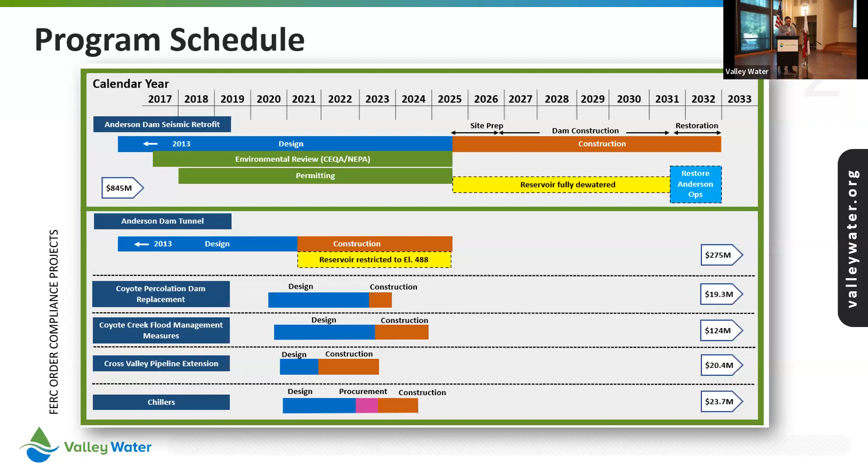Okay, so the Anderson Dam Tunnel Project. So we like to call this stage 1 of the Anderson Dam Seismic Retrofit project for 2 reasons. First, it's the first part really relating to the dam and the retrofit project itself, but also it's stage 1 of our diversion system that we need to pass flows from the reservoir out into Coyote Creek during construction. So a really important component of the overall project.

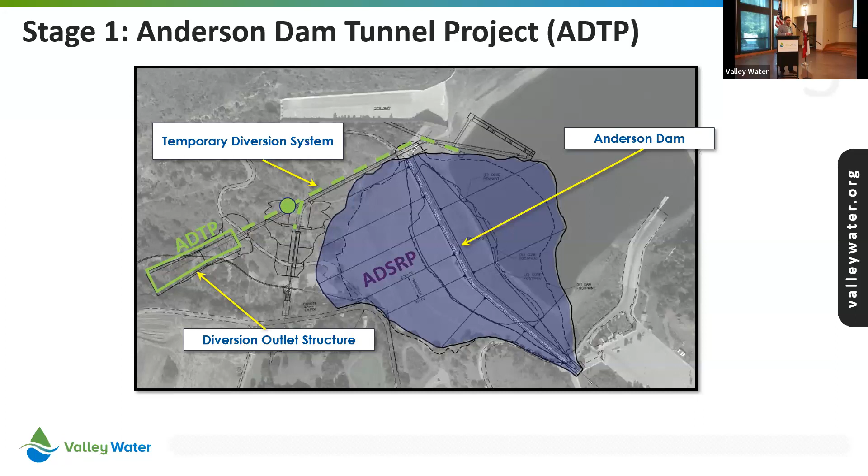So this is kind of an interesting component. This last stretch of the tunnel gets completed with a micro tunnel boring machine, an 8-foot diameter machine that will basically plunge right into the water with about 30 feet or so of head above it. So that's a pretty critical component here. So we're going to be coming in lower than the current level that we can currently achieve. So pretty fancy technology there to do that.

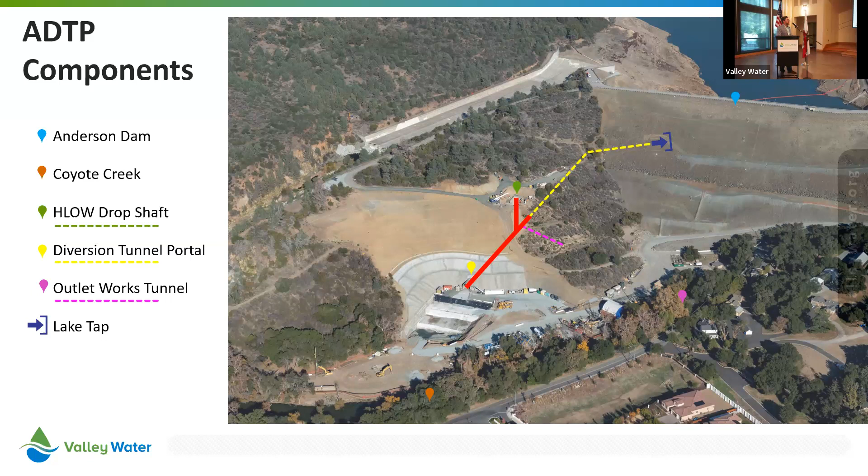So I'm going to click the button here and you're going to see the progress that we made on the tunneling. The shaft you can see is completed and the tunneling is past the shaft. We've completed about 440 feet of the tunnel so far. It's about a 1,700 foot long tunnel. So we made some good progress. We started on November 9th last year, and we're moving through it. It's not easy tunneling. It's a pretty big tunnel. It's 24-foot diameter where we are now, and the ground conditions are a bit challenging, but we're making it through.

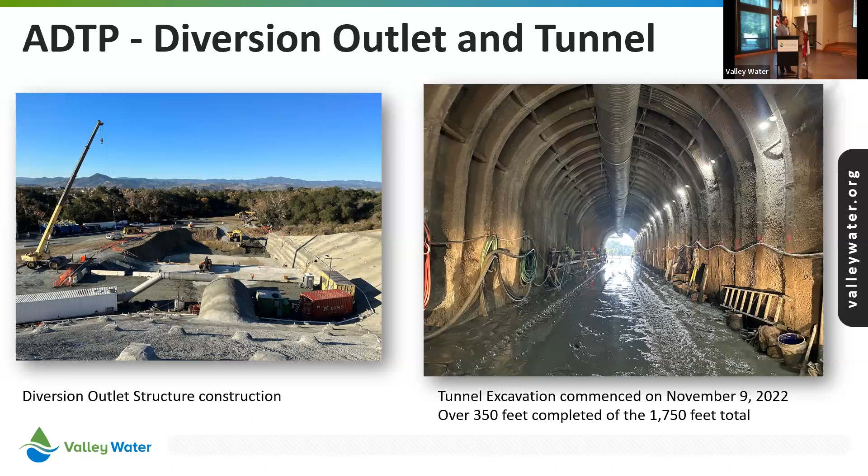But what we had to do is excavate down about 15 to 20 feet to remove all the soil and some of the old fill that was kind of adjacent to Coyote Creek prior to the dam being built. So we had to make sure we had a nice stable foundation for that. So pretty large excavation there. That's all been completed. And actually, I think there's a poster back there that shows a really updated photo of what the diversion outlet structure looks like with some of the formwork for the foundation. So be sure to check that out.

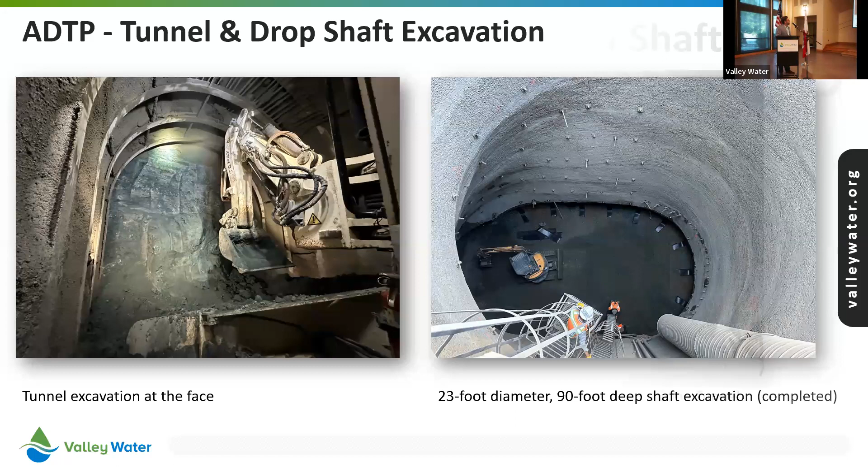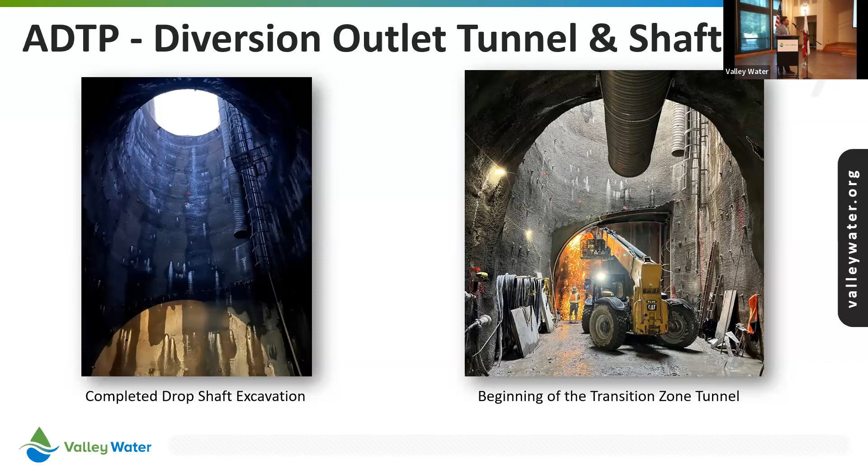And we are still looking at completing a slope stabilization project here on the Boat Marina landslide that consists of quite a bit of grading as well as soil nails being installed to support that slope. Working with our contractor to get a price. There's been some design updates and really upgrading what that looks like. So we're working on that. On the Hoot Owl Way landslide, kind of a similar situation as we looked at the monitoring and added quite a bit of design features and quite a bit more construction. It started to look like it was going to be pretty hard to actually stabilize this landslide for perpetuity, as well as it became really, really expensive.

So we looked into these property owners that own homes around here. There's I think 7 different property owners of 9 parcels total, and we started talking to them if they would be interested in selling. And actually, we've completed 6 of the acquisitions of these properties voluntarily, which has been great. And we're working on the 7th one as well. So no eminent domain needed there yet, so that's great.

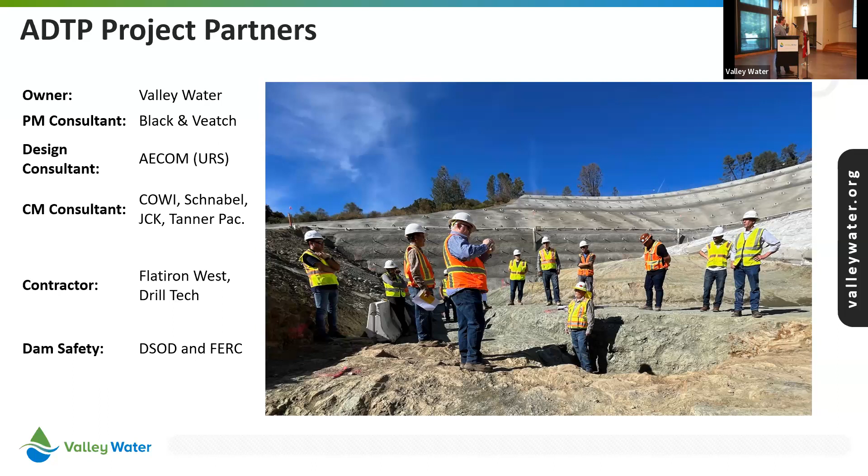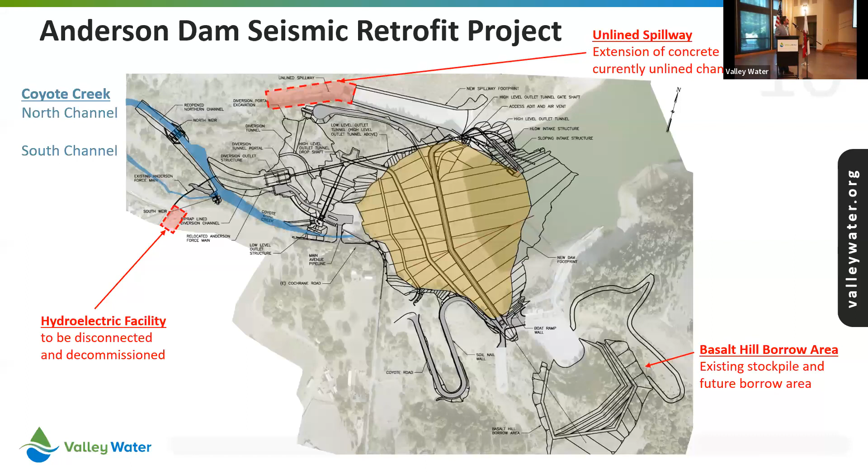Okay, so what I really wanted to tell you all about is the construction sequence of the dam embankment, because this is really a critical component of this project. It is why it's going to take so long, because people ask that question a lot, why this project will take so long. They built the original dam in 1 year, why can't we build it in 1 year? Well, things have changed. There's a lot more safety concerns. There's a lot more homes downstream that weren't there before, and a lot of other factors to make sure we build this thing right the second time.

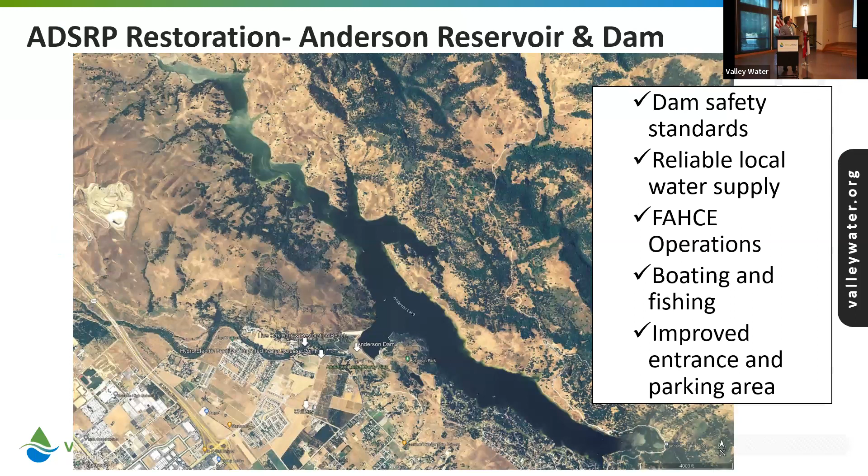And then the second question is, is the weather a risk for this project anyway? It seems like you're not doing construction during certain winter periods. Is the weather in any way something that could cause this thing to extend beyond 2032 if we had really unfortunate weather?

Yes, weather is definitely a big concern. It'll be difficult if we get early storms in the winter, like October and November rains, because we're still going to be working on these interim dams and maintenance starting in the summer and trying to get this work done. And that will be impacted. That's why we don't plan to do any work over the winter season, because basically we get to this point and we winterize the site.

We seal everything up. We create a spillway that will convey water if the water is to reach over the top of this interim dam, and a lot of other features to keep the site protected during the winter. But if there are early storms or even late storms in the late spring, that could affect our production.

And Ryan, so this was a pretty record winter, and it was completely at dead pool, and it got to 52%. So if we had a winter like we just had, and it was dry to start with, it would be at 50% capacity. So that's just a frame of reference, right? Yeah, I think it actually reached 56%, I think was the peak. Yeah.

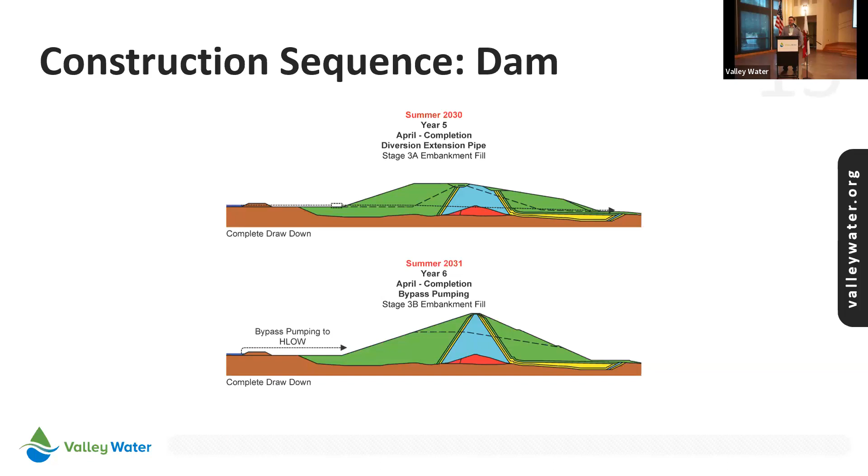Next question. Will the melting of the record level snowpack in the mountains pose a flood risk to this specific project? No. There's no connection. What are the implications to the surrounding land around the lake, specifically the homes, when water levels rise and lower with storms such as what we had this year? Yeah, I did have a slide. I talked a little bit about the rim stability and the movements that have been tracked over the years around the reservoir. Sure.

There we go. So I did talk about the Hoot Owl Way and the boat marina landslide areas, two of the areas that have been known for quite a while to be moving. Now I can't remember exactly what the question was. Is there something else that I needed to share?

Right. So these ground movements are activated by water and drying. When the water infiltrates into the ground and then dries out, there's movements associated as the slopes slowly move downhill. That's how they work. We've been monitoring these since we did the drawdown starting back in 2020, and then looking at how they were affected in 2021, as well as during this current year. There hasn't been anything too drastic.

We think a lot of the movement that we've seen was really just associated with the rainfall, the superficial movements and erosion from the rain coming through, and not so much the reservoir level. But it's something we're actively monitoring. There's a couple other locations, one near the dam, that we're also watching pretty closely. And we're seeing, as expected, what we would think would happen during these filling

and draining events. What materials will be used for the dam's new core? The core will be predominantly a clay material, so that it's not as permeable as a rock material, so the water can't flow from the reservoir through the dam. The reservoir area will be used as borrow material for the clay core, as well as the existing clay core. A lot of that material will be reused.

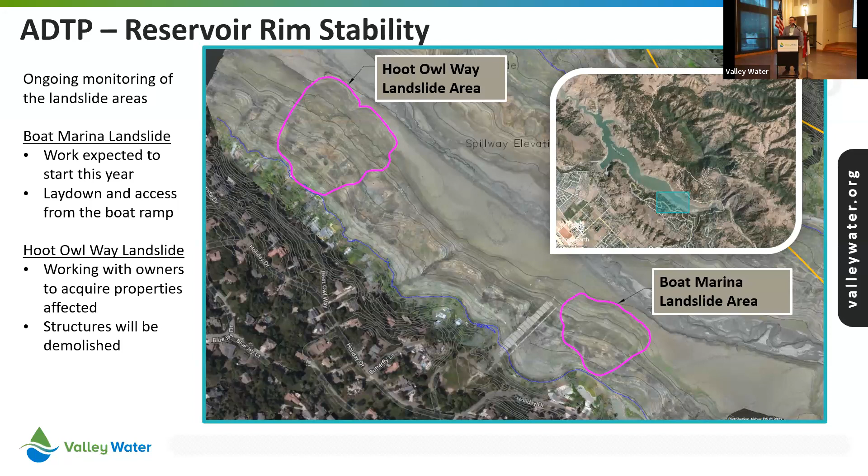So it is elevation 627.9. That's what the current spillway crest is, and that will be with the new spillway crest. Also, it will be matching the reservoir elevation and therefore the reservoir volume. In a dream world of resources, what would you need to make this project finish 2 years early? The dream world of resources. Geez, that's a good question.

You know, as I went through the construction sequencing, I guess there's not really a whole lot we can do to safely take this dam down and bring it back up any faster on the construction. But I think getting to construction, there's definitely some things that could go faster, working through a lot of the design and permitting issues and working with the environmental agencies. But I mean, all that stuff is necessary. We take it seriously to make sure we have a safe dam as well as an environmentally responsible facility.

So, ideally we could start faster, but I don't think that construction could really go any quicker unless we could guarantee there would be years of dry weather. Where will all the old fill material go? Sorry, can you repeat that? Yes, where will all the old fill material go? So we're going to reuse as much of the existing dam as we can, but what's left over, what gets screened out that won't be usable, will be placed, compacted into the reservoir itself. So in the future, it'll be underwater under the reservoir.